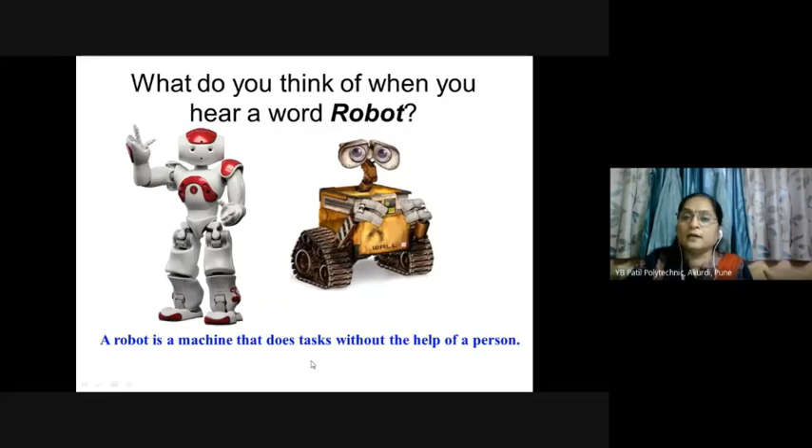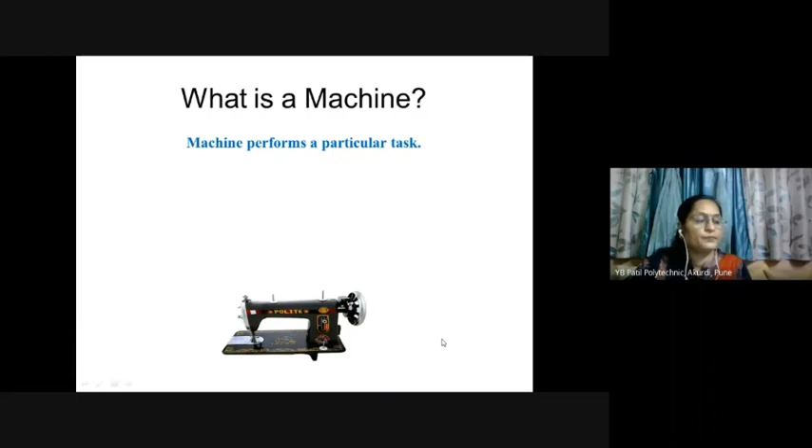Now, what is a machine? Let us see. A machine performs a particular task, as you know. Do you know this machine? This is a sewing machine. Another, bike or motorcycle. This one is a car. These are all machines, right?

Iron Man. So what are the main characteristics of Iron Man? Iron Man can fly, he can fight, he is having power, right? So Iron Man is a strong man. Yes, this you are knowing.

Now let us see what task. Do you know why I took Iron Man as an example? Because Iron Man is a robot, right? Iron Man is a robot.

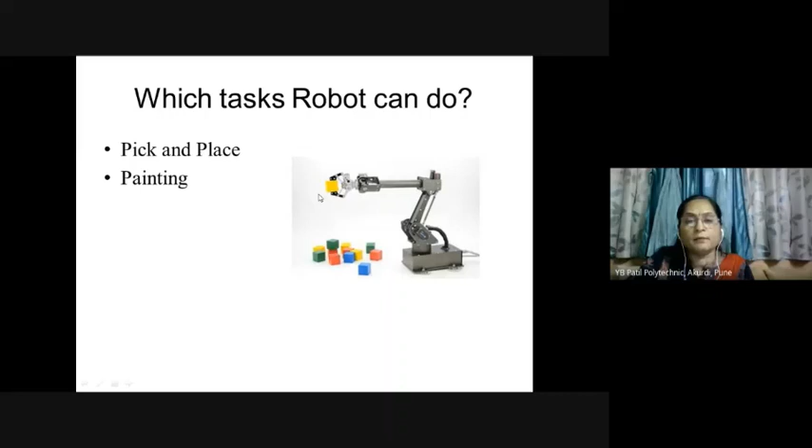Now let us see what tasks a robot can do. See which task this robot is doing: pick and place, it is picking the object and placing it. Then the second example is painting - if we connect a brush, it can paint. It can do entertainment, drilling - if we connect a drilling or welding machine, it can do such work. Cutting, packaging, sorting, bending, and many more. Assembly also, like car assembly, right?

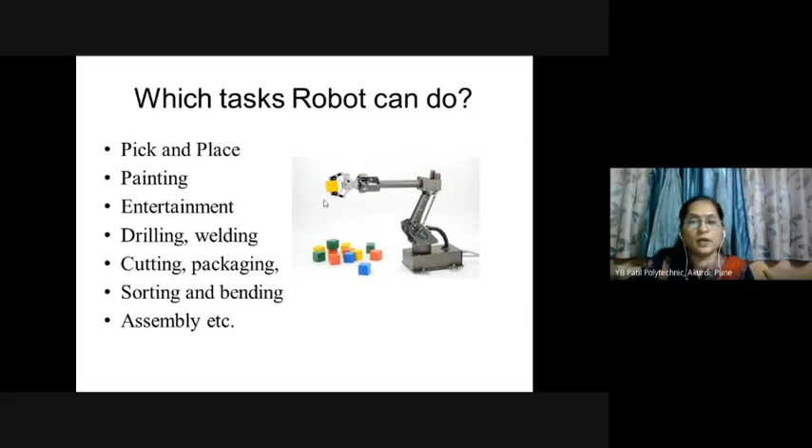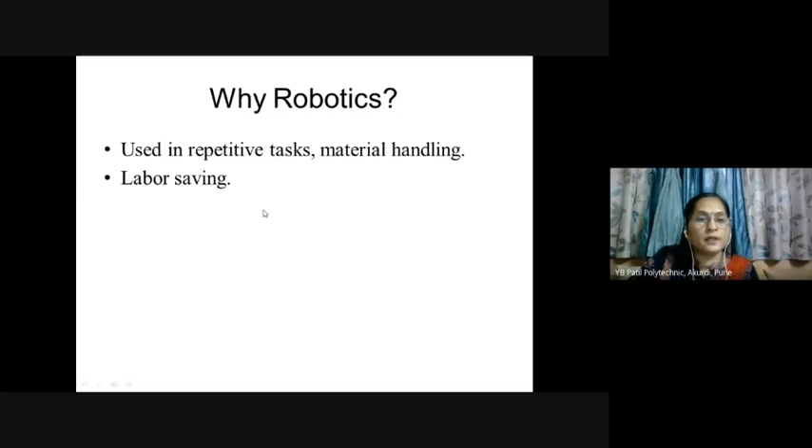Now let us see why robotics. Why study robotics? Robotics is used in repetitive tasks, for example pick and place type, that is material handling tasks. The second advantage of robotics is labor saving - it saves labor. It is used in high precision, high accuracy, high quality tasks, and used in dangerous tasks or hazardous environments.

For example, now in COVID, in this pandemic situation, where can robots be used? Can you write down in the chat box where robots are used? Right, in hospitals, very good examples you are giving. Anywhere else - in malls we can use them, in isolation wards, right? Very good, these are the various examples of robotics.

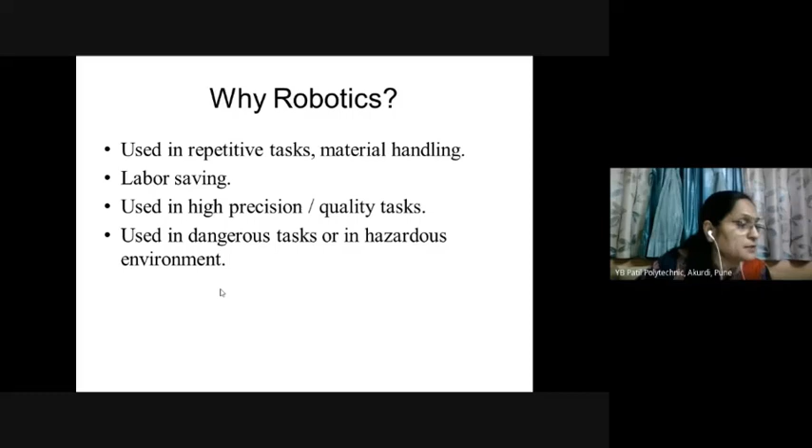Now, for industry purposes, on roads to clean, right? To detect the distance, very good. Now let us see, now our practical starts, right?

Let us see how to build a small robot, a simple robot hand. So we are going to build a small hand. First you have to observe, all students requested to first observe, and then if time permits you can do it. Otherwise you can do it in the evening and WhatsApp the photo.

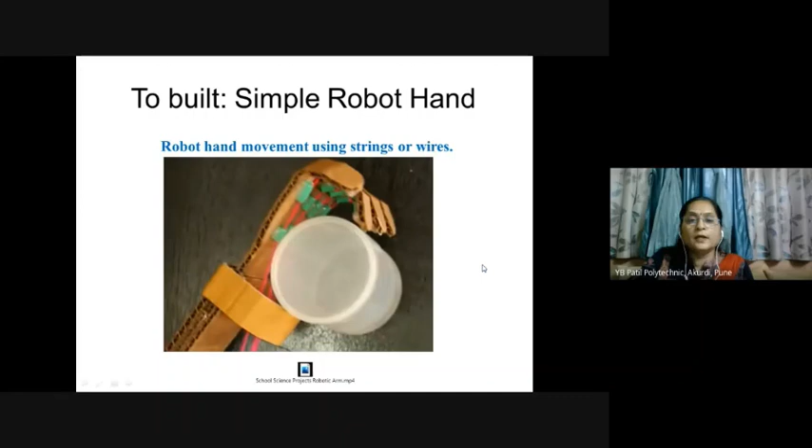So let us study how to build this robot hand movement using string or wires. Now I'll play a video for you. See, this robot hand we are going to build.

See, by using this robot you can pick a container, a plastic container, right? You can move the fingers. So let us see how to build this using simple cardboard and woolen thread. Now, take a cardboard and trace your hand - you have to trace or draw three fingers, the middle three fingers, and one thumb.

You can cut it in outline. Now here, since we want movement of the fingers, bend those fingers by using a scale. You have to bend those fingers by using a scale, so that bending action can be done very easily. Since it is a hard cardboard, you have to bend it, right? So now hand is ready.

Now other connections we have to do. Now forearm, we have to connect the pieces, two small pieces and two big rectangular pieces. See how they are connected. Afterwards, I'm going to post this on WhatsApp group video.

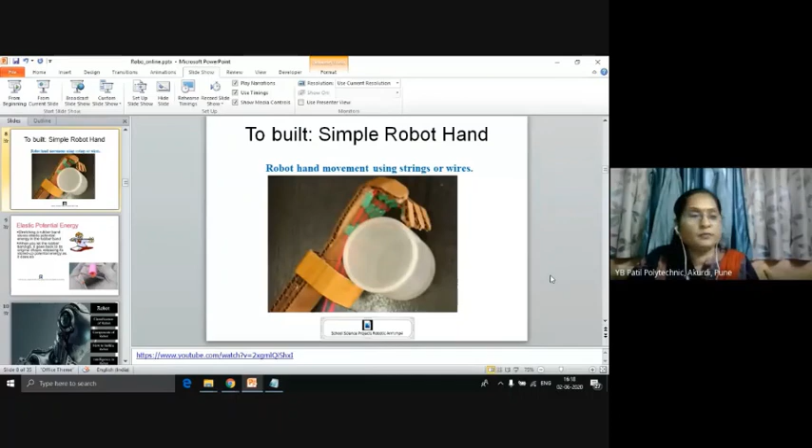Now one more thing we are going to study, a small type of robot we are going to study. So this robot hand is finished. Now,

By stretching a rubber band, it stores elastic potential energy. So whenever you will release this rubber band, what will happen? The potential energy gets converted into kinetic energy. So let us see how it works.

So this small tiny robot we are going to prepare. For it, what we are going to do? We are going to use the rubber tube that is inside a pen, so that we are going to use it.

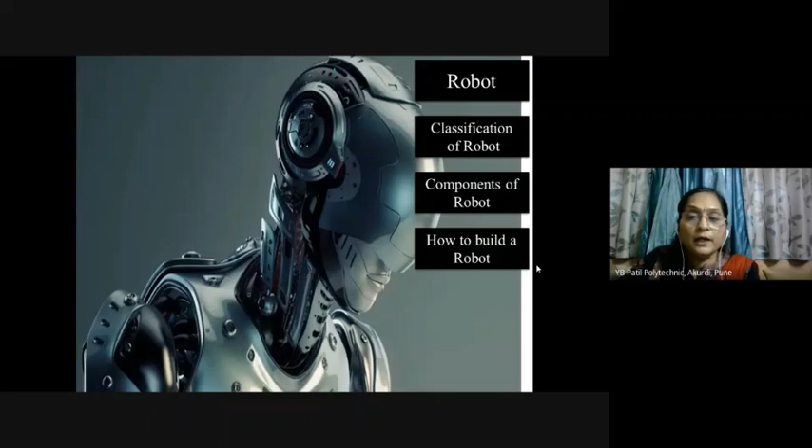Now let us study different types or classification of robot - the classification, different components used in robot, then how to build a robot. One more robot we are going to build. Now the difficulty level will increase, covering intelligence in robot and required skills in robot. Which skills should you learn to learn robotics? Let us see different types of classification of robot.

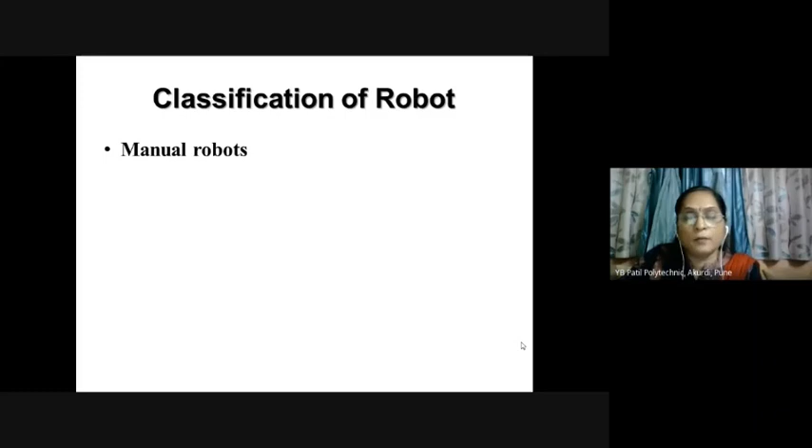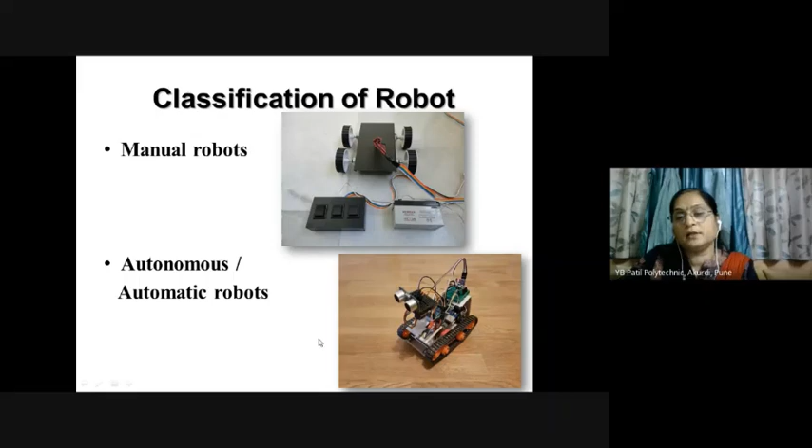The second one is autonomous or automatic robot which can move automatically. Then the different categories of robots are wheel robots - single, 2, 3, 4, or multi-wheel robots. Legged robots having 2 legs, 3 tripodal, quadrupedal meaning 4 legs, 6 legs hexapod. Fixed robots are also there. Let us see one by one each type.

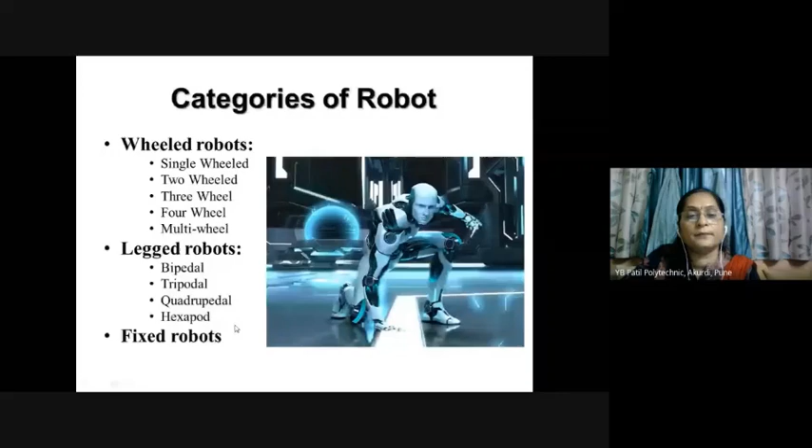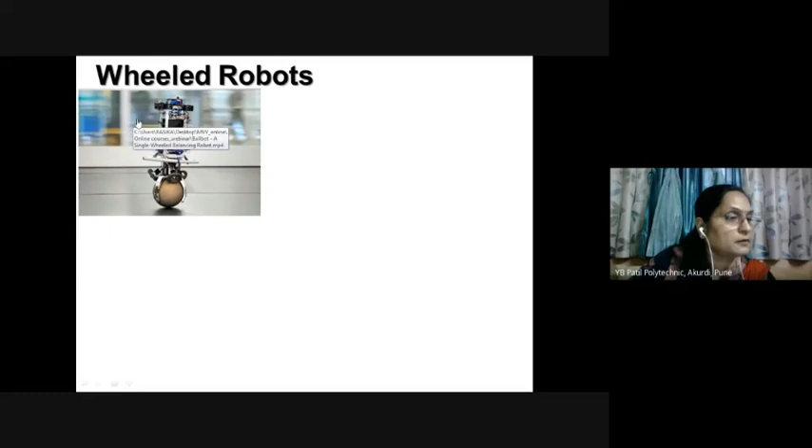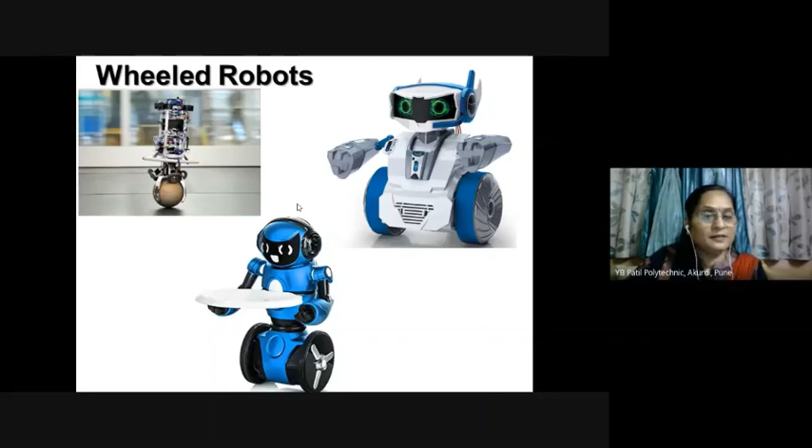Wheel robot - see how many wheels are there? Can you write down in the chat box? Yes, one. This one, this one - 2. Very good. This one, again 2. Very good, Atharva, Srushti, Tejas, all are alert.

Now how many wheels are there? Can you see? 6, very good. The last one, this type, how many? Not 6, 8. Very good, very good. So all are alert - Snehal, Srushti, Hema, Tejas, Atharva.

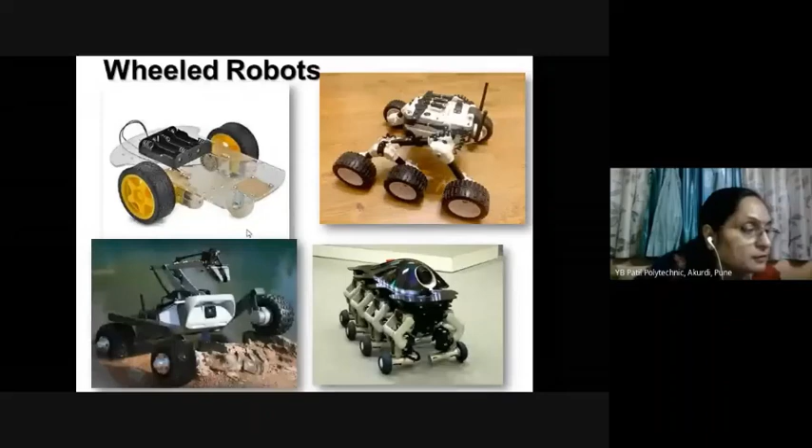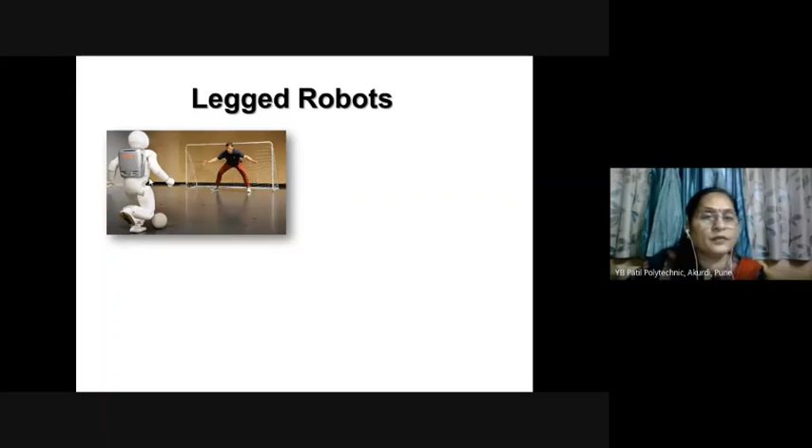Samiksha, Sagar. Now, legged robot - different types of legged robots which are having legs. Do you know the name of this robot? Write down in the chat box. Yes, do you know the name? Asimo, right. Then again, a 2-legged robot.

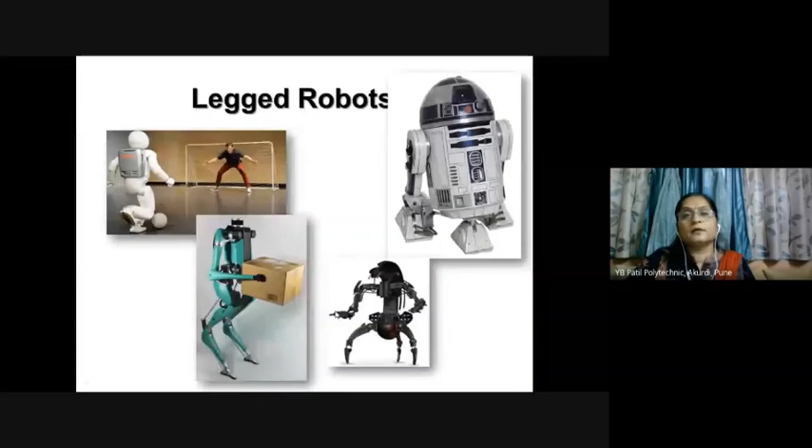Now can you observe the presentation? Yes, madam. Okay, now let us see more types of legged robot.

Four-legged robot. Again, four-legged robots are used in jungles for military applications. These are generally used. Six-legged robot.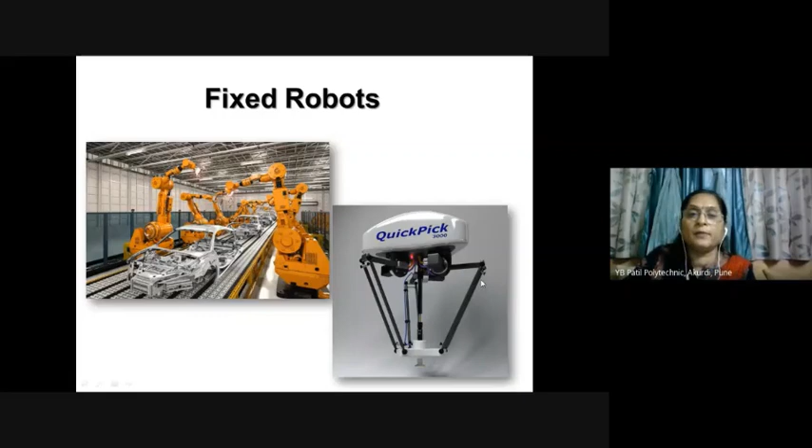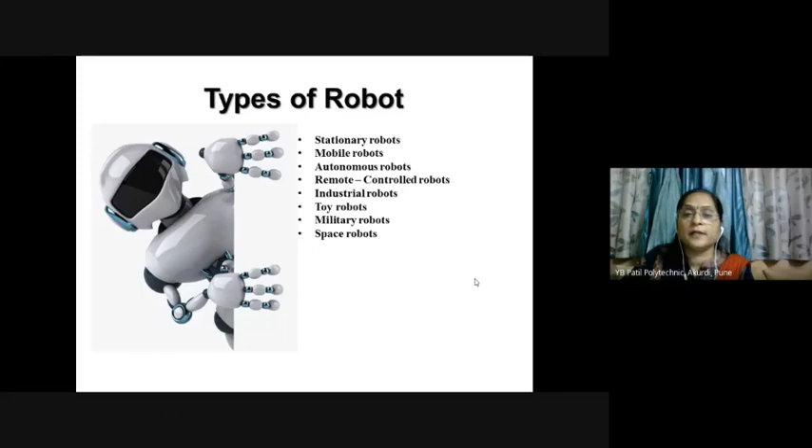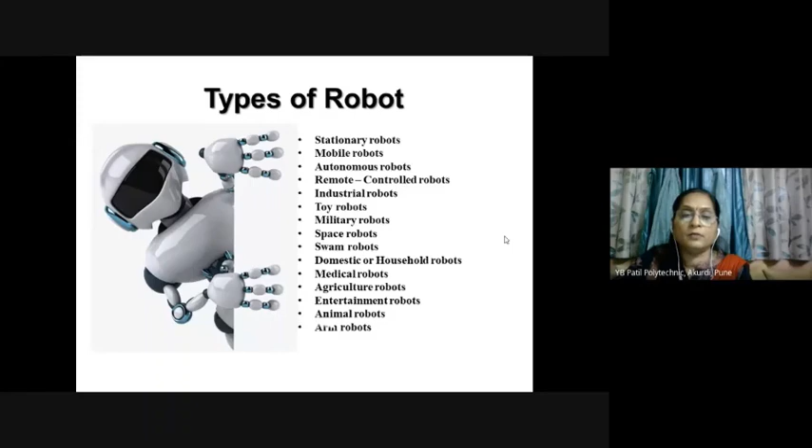Now let us see more types of robots and their applications - stationary robots, mobile robots, industrial, toy robots, military robots, space robots, swarm robots, domestic or household robots, medical robots, agriculture robots, entertainment robots, animal robots, arm robots. Let us see one by one the stationary robots and mobile robots.

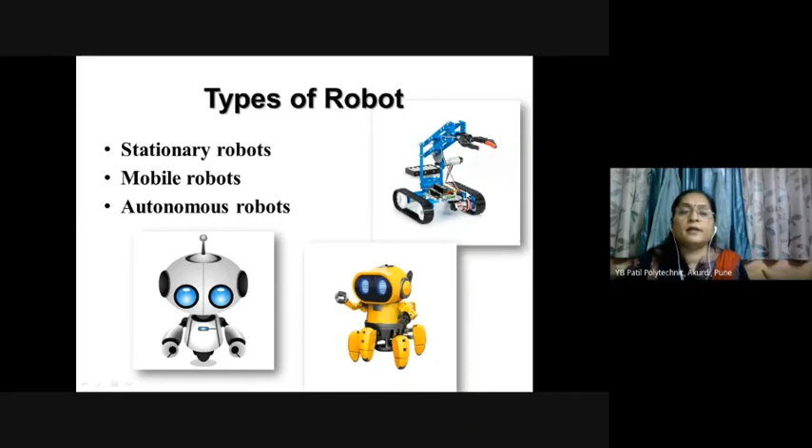Can you see this? Tell me whether it is stationary or mobile robot. Write down in the chat box. Yes. What about this? Again, this is mobile. These two are mobile robots. Autonomous robot - see, this is an autonomous robot, which can move automatically or independently.

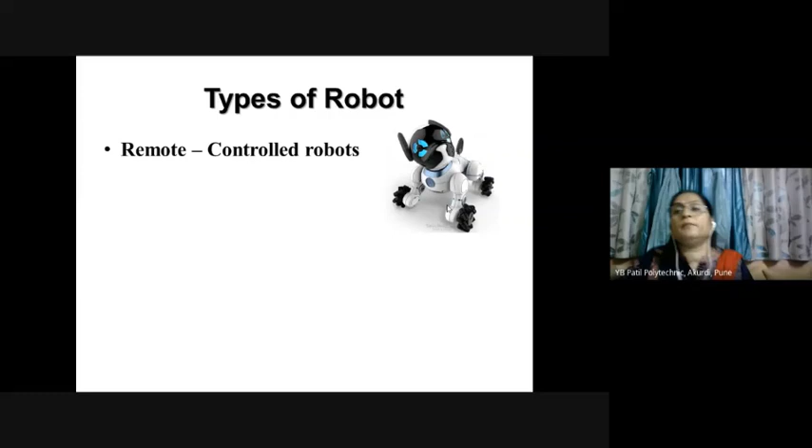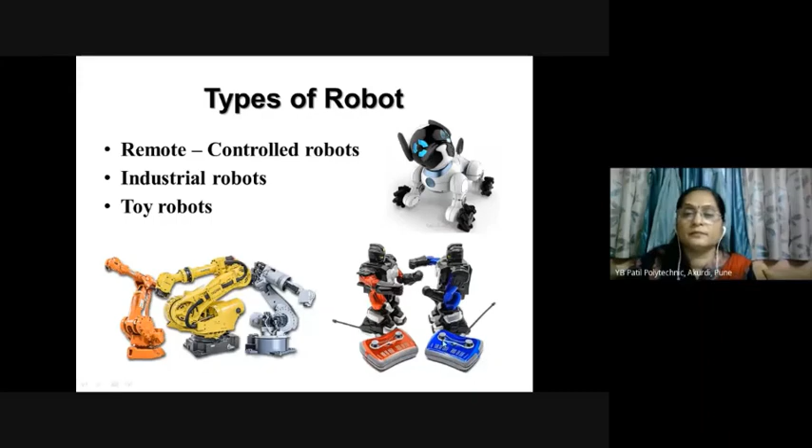Now, remote control robot - this can be. So these are fixed robots, used in industry. Toy robot - these two are toy robots. Can you observe here? The joystick is used for movement, for fighting of the robot. This instrument used in hand is called a joystick, toy robot.

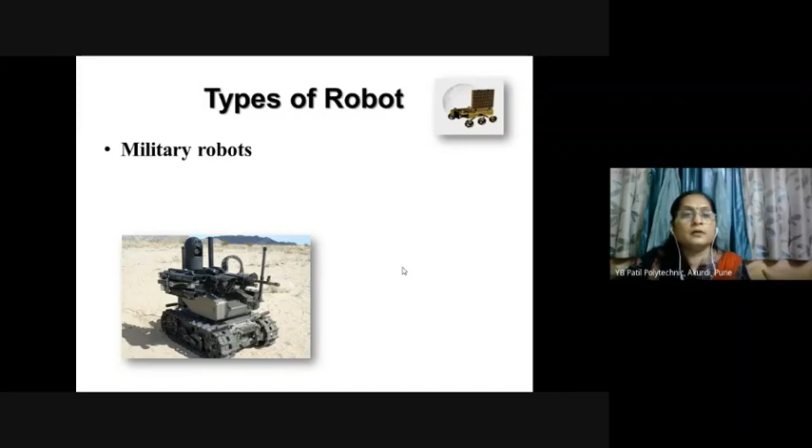Space robot. Now identify which robot it is. Yes, who can tell me? Open your mic and tell me. Any one of you can tell me the name of this robot? Yes, can you identify?

Do you remember Chandrayaan, which was recently done by India? Yes, Chandrayaan it is. Chandrayaan 2, right? Yes, Snehal is right.

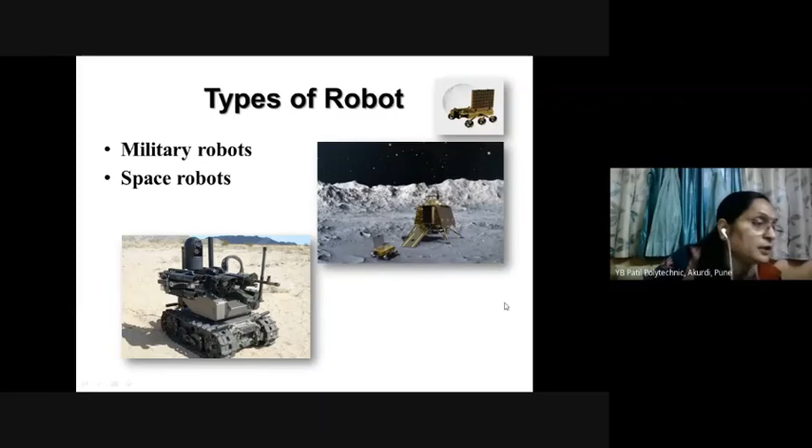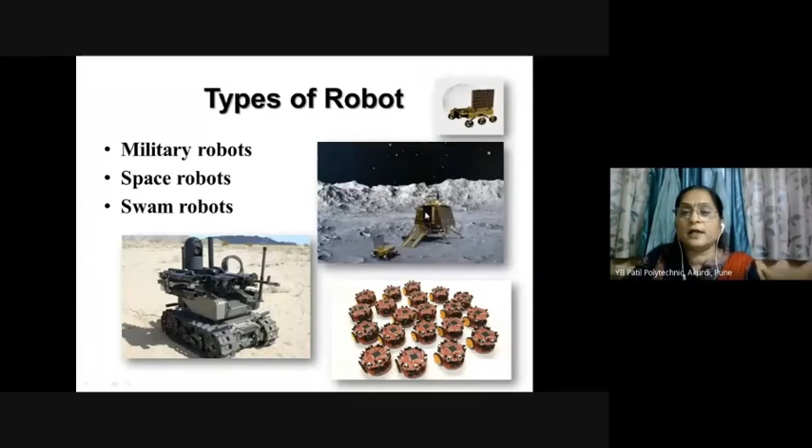Swarm robot, third type is swarm robot. The name itself tells you these are tiny robots, used in bulk or in mass. This one is Chandrayaan robot, and this is the swarm robot.

The other type is domestic robot. See, this is the domestic robot. What does it do? It is acting just like a waiter, serving the food to the lady.

The another type is medical robot. See, for medical application, for surgery, robots can be used in hospitals. Many of you know it very well.

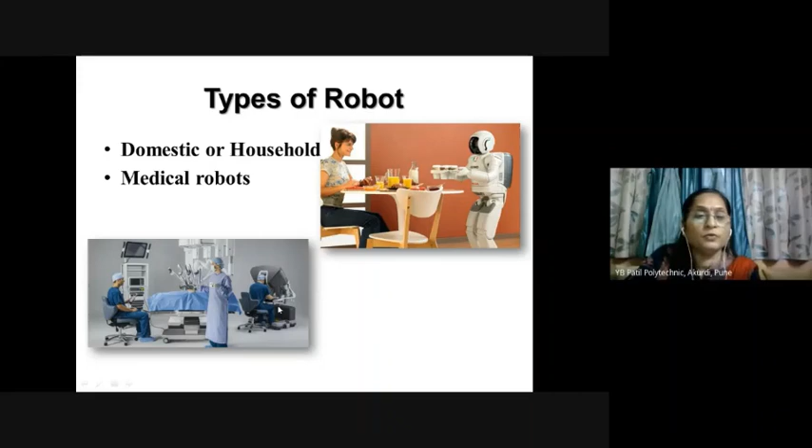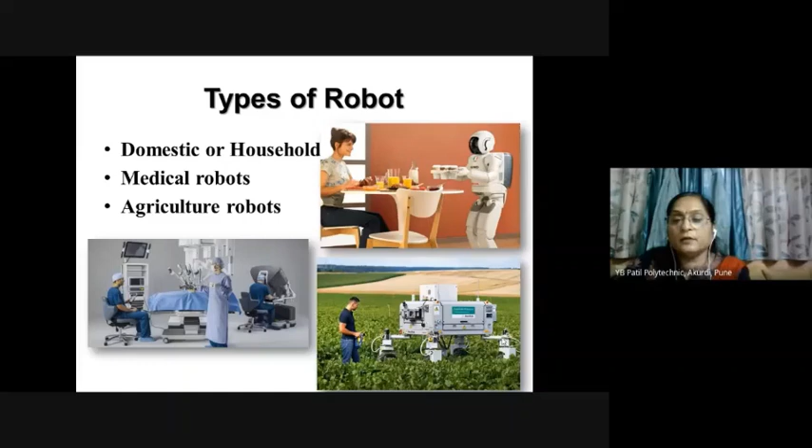And the agriculture robot. Can you observe? This is the robot used for agriculture purpose, for monitoring the health of plants. Yes, it can spray pesticides, right? It can inform the farmer which chemicals you have to put.

Now again, different types of robots. Entertainment robot. Can you observe this? These are playing musical instruments.

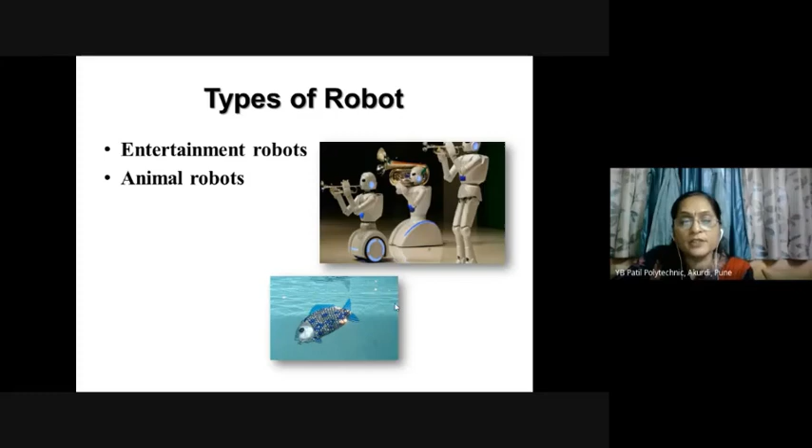Animal robot. Now tell me, this is fish. Yes, robotic fish it is. Now see what it is. Yes, cobra, a robotic cobra it is. Snake.

Which animal it is? Write down in chat box. Robotic... Yes, kangaroo. Very good, very good. Snehal, Samiksha, Srushti.

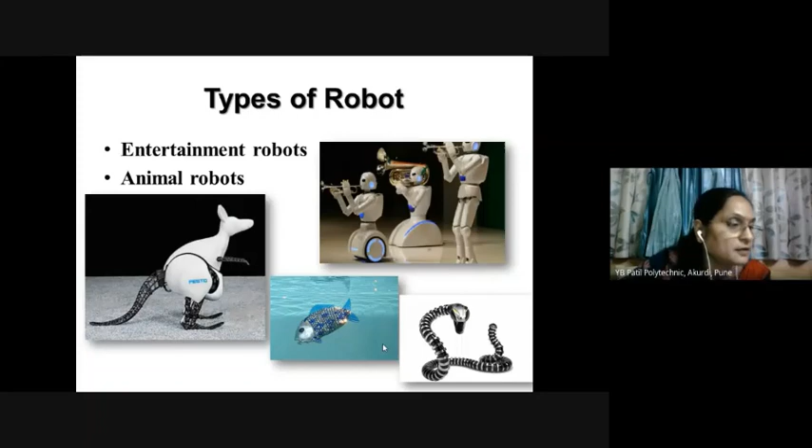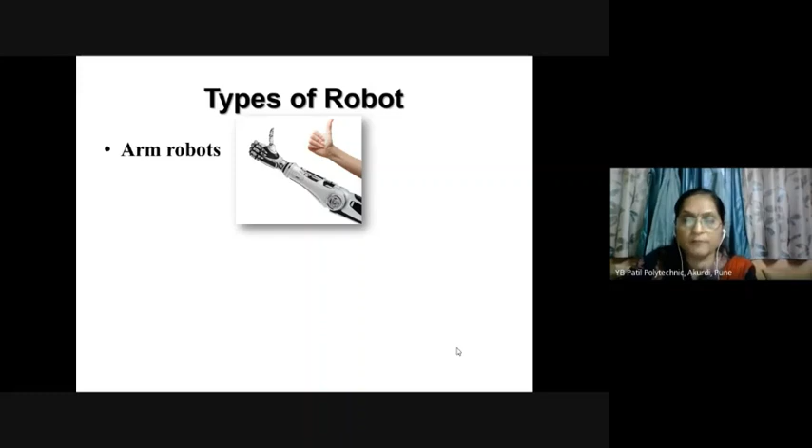Yes, correct answer. Now, arm robots. Let us see arm robots. Yes, just like your arm, it is. Now, which we have prepared by using cardboard. Yes, arm robot. This is also arm robot.

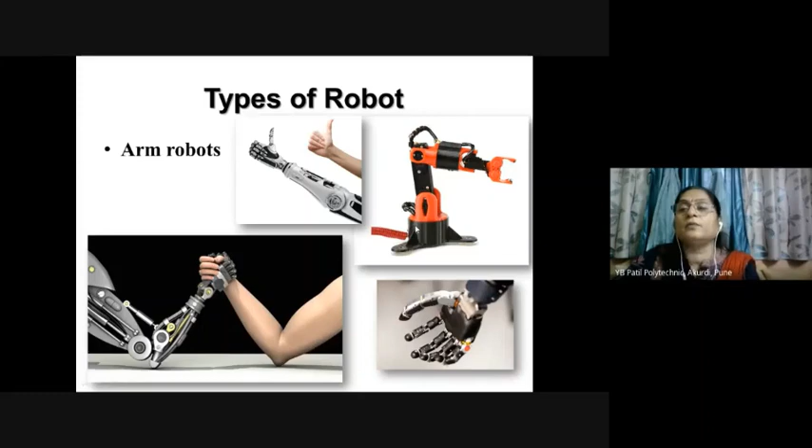Now see what it is doing. It is acting as, it is used as a wrestler. Arm robot. And this industrial arm robot is used for industry purpose, right?

Now next is point. Up to here we have studied different types of robots. Now let us see the components of robots, different components used in robot. So the first component, batteries or solar cells are generally used in industry.

Hydraulic or pneumatic power supply is used. Do you know hydraulic supply uses oil as the media, and pneumatics use air pressure as the media.

Now, another component which is very important in robot is actuators. Yes, actuators are the energy converters, an energy conversion device which converts energy into movement.

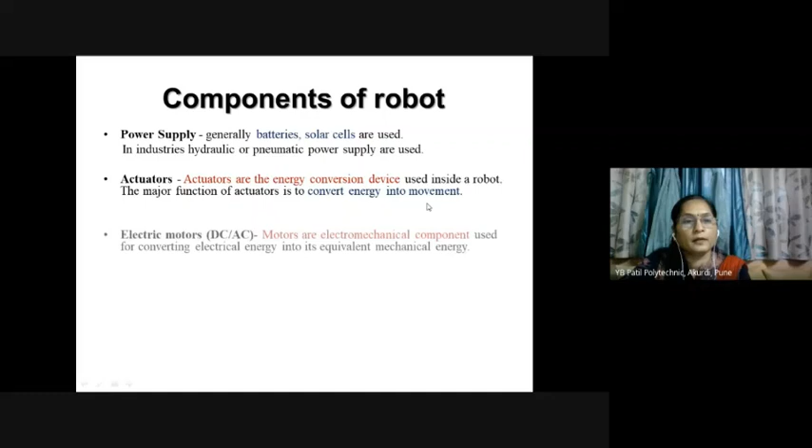The type of actuator is electric motor. Motors can be of DC or AC type. What do motors do? Motors are electromechanical components. It converts electrical energy into mechanical energy.

So in robots, motors are used for providing rotational movement of a wheel or any part. If you want to rotate, you can use a motor.

Yes, now the main part starts. Sensors. Yes, sensors provide real-time information of the environment. Generally, camera is used as a vision sensor. Microphone or mic is used as an audio sensor.

So speakers are there. Speakers are used for interaction purpose. And tactile sensor, it is used for touch, as a touch sensor.

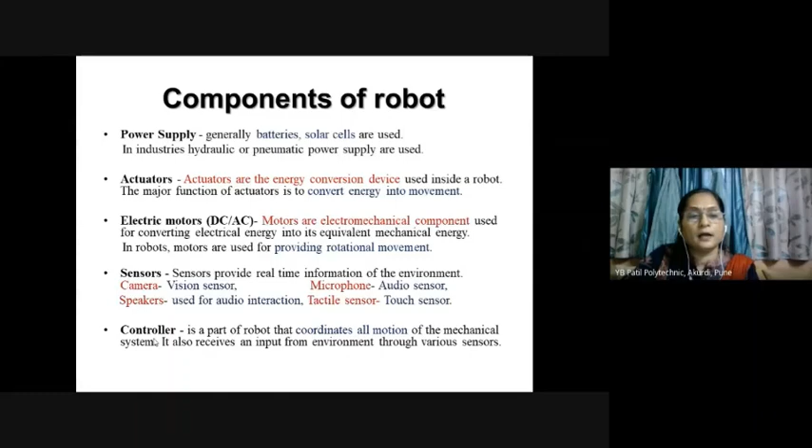And the main heart of the robot is controller. Yes, this is the main heart of the robot. Main heart or main brain we call it. Yes, main brain of the robot. It coordinates all the motion of the mechanical system. So the brain of robot is microcontroller.

This part we are going to deal afterwards in next lecture, which is connected with the input/output and monitoring devices, right? So these are the different components of robot, 5 different components we have studied. Power supply, generally batteries or solar cells are used.

Actuators for converting energy into movement. Electric motors for, again, rotational motion of the wheels. And sensors, different sensors we have seen. Camera for vision purpose, mic or microphone for audio sensor.

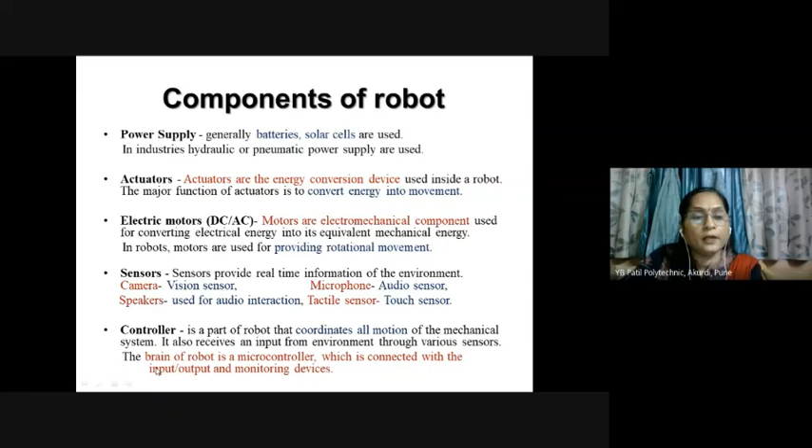Speakers you can use for audio interaction. If the robot wants to tell you anything, then he can turn on the speaker. Tactile sensors are the touch sensors, right? And the main or brain of the robot is microcontroller or controller.

Now let us see one more robot. Yes, practical session. This I'm going to show you just a picture, and you can do at home easily. But few elements are required here. See here, 2 wheels are required, small 2 wheels, 2 switches, battery supply, and here a small motor will be required for movement of the 2 wheels.

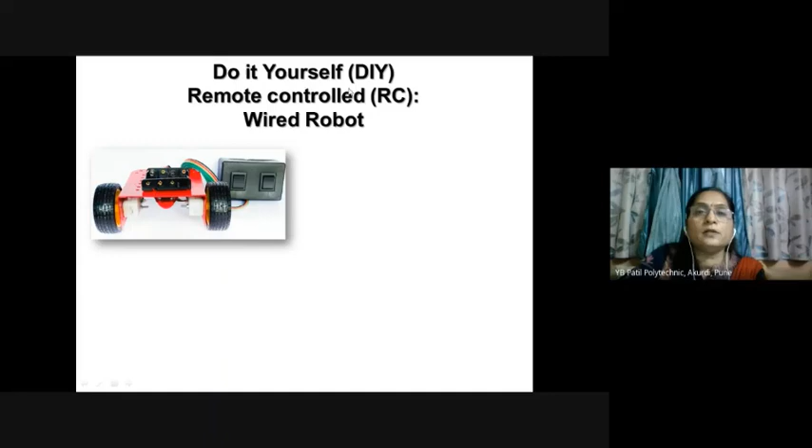You can turn on the motor by using these 2 switches. So you have to practice this, right? If time permits, I will surely take a hands-on session on this type of robot. So it is also called do-it-yourself, DIY type remote control wired robot. See here, a 2-wheel wired robot is shown.

So observe this first, right? Now let us see different parts of this NAO robot.

So the first part is microphone. Multiply by 4 means there are 4 microphones which detect the sound.

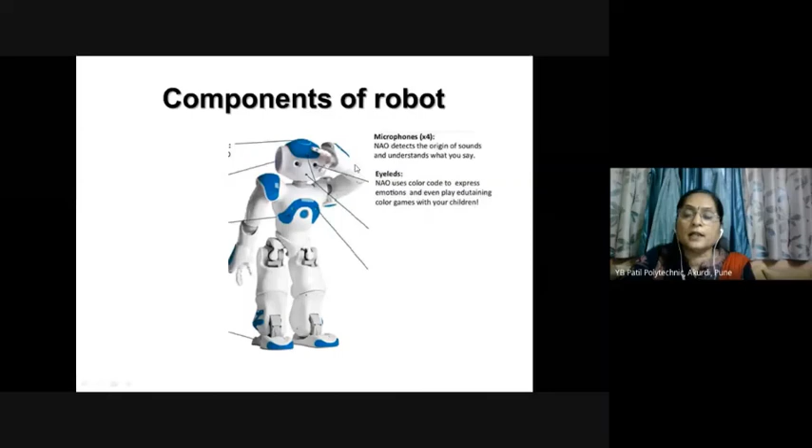Another sensor is eye LEDs. These are the sensors through which the robot can express emotions. How does it express? If the eyes are red, can you tell me in the chat box which expression will be there? Whether it is angry or happy?

Yes, the robot is angry. Very good, very good. Atharva, all are knowing. Good. Snehal, Atif, Sagar, very good.

Now the next type of sensor is speaker. There are 2 speakers in NAO through which it talks, prompts, shares his story, plays music, right? And the tactile sensor, which are the touch sensors, are available in NAO. The battery, which is the food of the NAO robot.

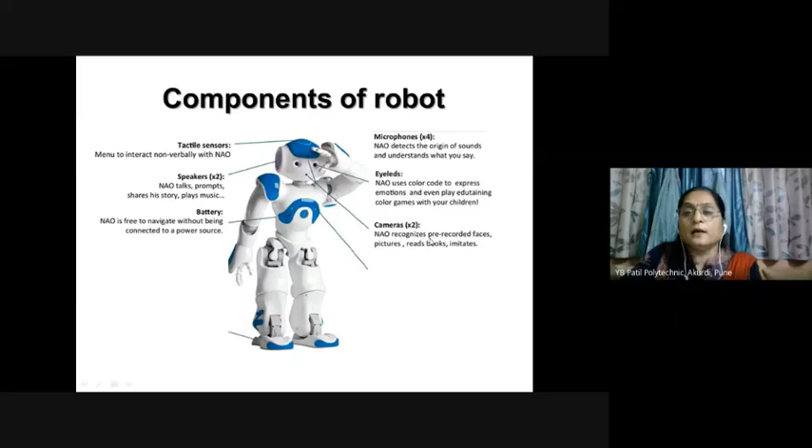Cameras, yes, camera for vision purpose. It can observe your face. Pre-recorded faces are there, so he can identify you. Pictures are there, you can read the books, imitate.

Now, in hand also there are sensors. It can grasp or grip some material in it.

Sonars. See here, 4 sonar sensors are there. Do you know what are these sonar sensors? These are emitting sound signals, and detecting the object which is close to the robot or in front of it. So sonar signals are passed, sound signals are passed, and within how much time the sound gets reflected, that time period is measured. So like this, it can find out whether the object is close to it or far from it.

Now in foot also, see, foot bumpers are there in NAO to interact, right? And the last part, which is very important, is how he knows each and everything, because he is connected to the Wi-Fi. So he can refer Wi-Fi, through Wi-Fi connection he can access the web and tell you the answer of each and everything.

Now let us see if there is any difficulty in these different components of robot. Have you understood? Please write in chat box. Atharva, have you understood? Remaining students, is each and every point clear to you?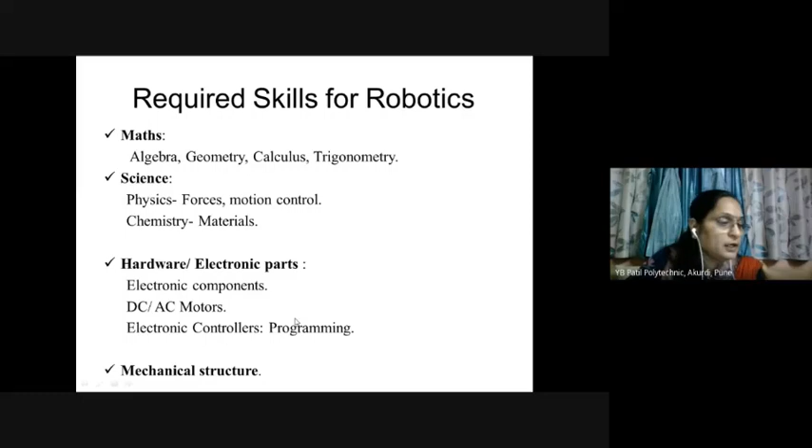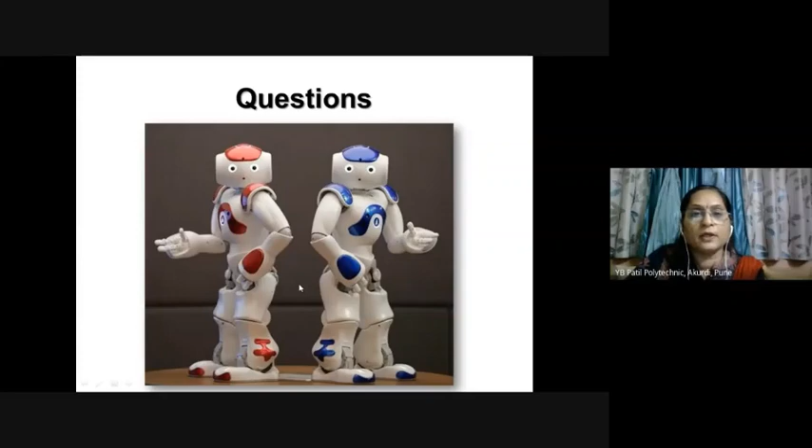Okay, now a few questions for you to answer using your chat box. Question number 1: which type of power supply is used in robot? The options are batteries, solar cells, hydraulic and pneumatic power, or all of the above. Write down the options A, B, C, D.

Students answer: only batteries. But actually all these options are used: batteries, solar cells, hydraulic and pneumatic power. Have you understood?

Shall I give you the next question? Second question is based upon actuators. What work does an actuator do in a robot? Option A is convert energy into movement, or convert movement into energy. What about option B? Where is option B used? Can you write the answer for option B?

Where is it used? Which one converts movement into energy? Do you know generators? Yes, this is used in generators. Very good, generators.

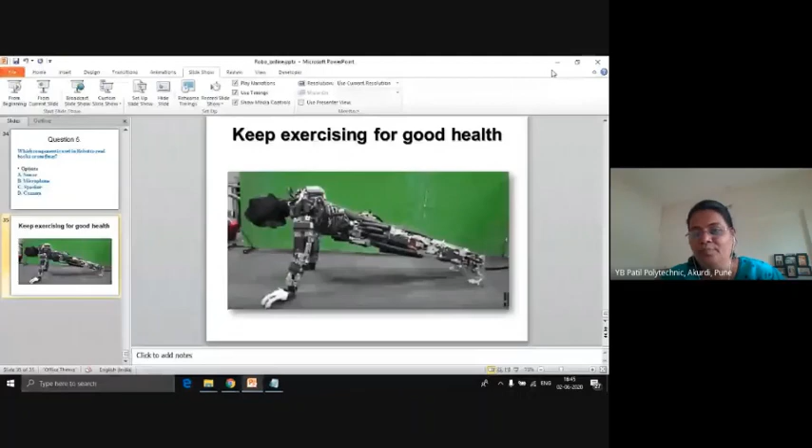So let us stop here. Now, if you are having any doubts, please tell me. Any questions? If you have any questions, please ask.

Snehal is asking about swarm robots. Swarm robots are very small robots, used in bulk amounts, meaning many swarm robots are used together. Generally, these are used for entertainment games like football, and also for military operations. So swarm robots are small robots, as the name suggests.

There are huge career opportunities in robotics and technology. If you want, I can give you a list on the last day. We are going to tell you overall about career opportunities on the 5th of June.